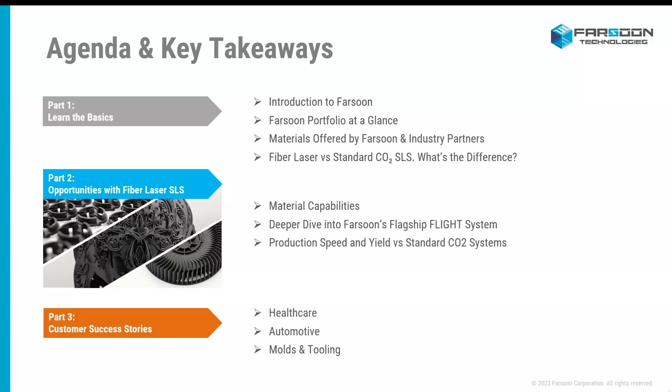Let's take a quick look at our agenda for today. First, we'll learn the basics - who Farsoon is, what materials we offer, as well as our industry partners and the key differences between fiber and standard CO2 SLS systems. Then we'll dive deeper into our fiber systems and the opportunities they unlock. To wrap up today's webinar, we'll take a look at a couple of Farsoon customer success stories using our fiber technology.

Farsoon globally has grown exponentially in the last year as we've broken ground on our new headquarters offices and a new material factory, as well as hitting the 1,000 mark for systems sold around the world.

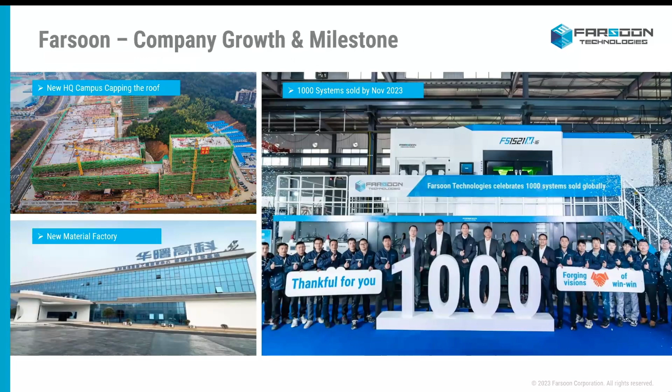Farsoon Americas, located in Austin, Texas, offers a dedicated local service team and inventory with key machine components sourced in the US. Farsoon Americas also offers a strong technical and application support team to assist customers on site in machine operation and material development, or remotely from our Austin office.

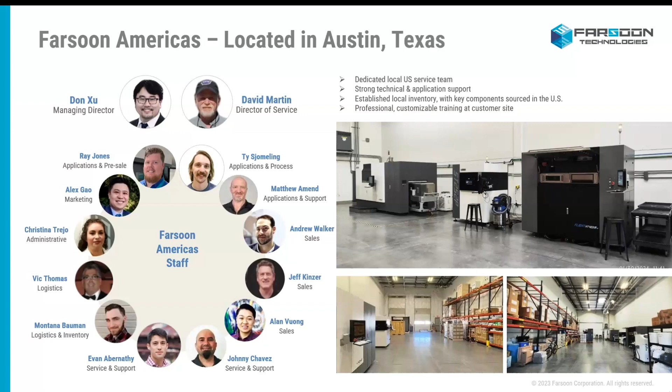Over 10 years of technology innovation, Farsoon has developed a comprehensive polymer machine portfolio, which features a wide range of build envelope and temperature capabilities that suit many industry applications, from material development and series production to large-scale parts and continuous manufacturing.

In 2019, we announced our biggest technology innovation with our flight technology by replacing the CO2 laser, which is traditionally found in SLS systems, with a fiber laser. This offers high-speed production and fine detail feature options to Farsoon's SLS systems.

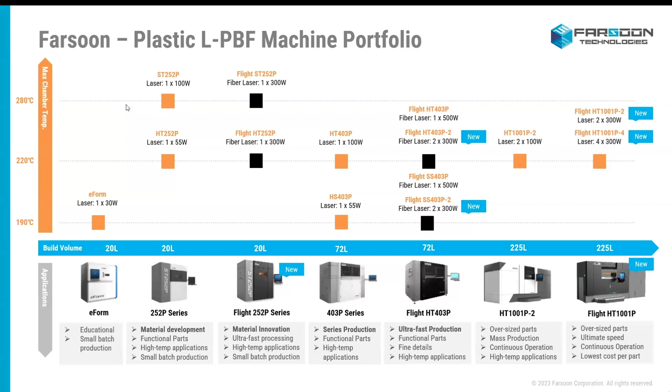Looking at our polymer system portfolio, we can see that Farsoon offers a variety of options based on customer needs and budget. We offer a variety of build volumes from 20-liter small batch production and material development systems, to 72-liter serial production systems, to 225-liter oversized part and mass production systems. Max processing temperatures range anywhere from 190 to 280 degrees Celsius. Our customers can really choose and fit a machine to their specific needs and applications.

Farsoon believes in an open material and platform environment. What this really means is that while Farsoon does manufacture our own PA12, both neat and filled variants, as well as a PA6 glass filled material, we partner with some of the industry's largest material manufacturers to help fill the gaps. This offers our material portfolio from base PA12 materials to TPU and TPC, PA11, both neat and filled variants, polypropylene, PK5000, ESD materials, and many more.

We have ready-to-go material parameter files for all of our partner materials, as well as processing assistance if needed. Additionally, as part of our open material platform philosophy, we open several key parameter values to the end user to fully assist in material processability.

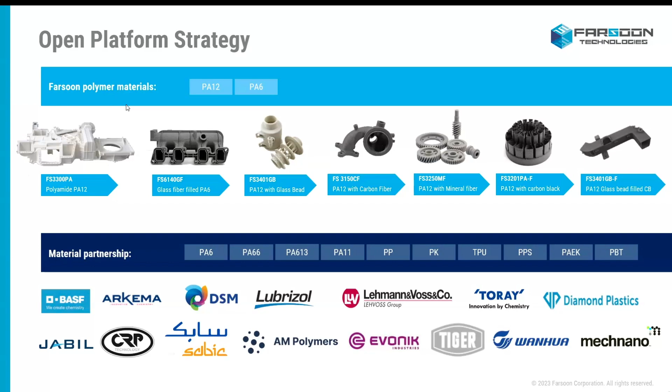So comparing CO2 laser and fiber laser systems, we can see a couple of key differences. The first key difference is laser beam spot size. Traditionally, CO2 SLS systems use a laser with a spot size anywhere between 400 and 500 microns. This usually restricts our minimum feature size to about 1 millimeter, or about twice the size of the laser spot size. We can see though with a fiber laser, we can get down to around 100 microns in the contour or outline pass to get real fine feature details around 0.3 millimeters.

We are also able to open the fill pass to 1,000 microns, which greatly decreases build times. The second key difference is laser power.

The standard operating range of CO2 lasers is usually around 30 to 120 watts. Fiber lasers, which are traditionally used in metal laser powder bed fusion systems, because of their more dynamic power range, can access wattages between 300 and 500. This gives us not only overhead on material processing ability, as some materials may need more laser energy at the bed than others, but this also unlocks a significant increase in scan speeds from 10 meters per second on the low end to 20 meters a second.

The last key difference between CO2 and fiber lasers is their average lifespan and operational stability. On average, a CO2 laser has a lifespan of approximately 12,000 hours, or roughly between 2 to 3 years of operational use, depending on power usage. Power stability on the laser, how much it drifts during operation, can reach upwards of plus or minus 6% during extended continuous usage.

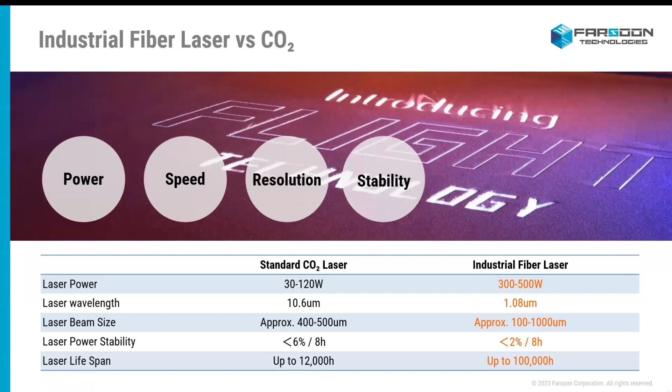So using a fiber laser unlocks more laser power, which allows us to more easily process higher tier engineering grade materials. Traditionally, to process materials like PA6 or PA66 or PAEK, which need higher energy densities at the part bed, a double fill scan would be needed, as most CO2 lasers can only safely reach about 100 or 120 watts on a single pass. So this primarily increases build time and laser life usage.

With a max laser wattage of 300 watts on our dual flight laser system, or 500 watts on our single laser flight system, we can process these materials in a single scan at a much higher laser wattage. This can potentially cut build times by 50% and also increases laser component life because there's less stress on the laser components.

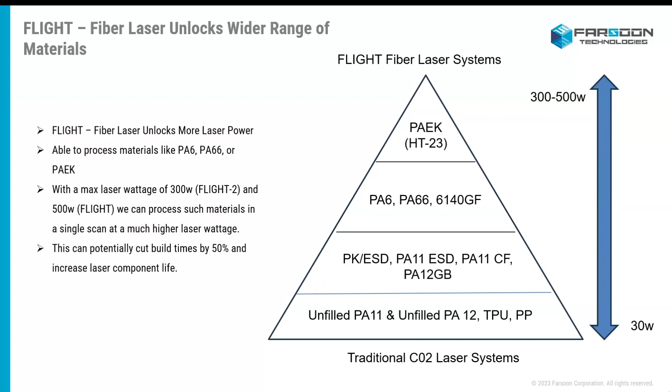So what materials can the end user of our flight systems expect to use? As we can see, there's an extensive list of materials ranging from base PA12 to PA6, PK, which is a polyketone material, polypropylene, PA11, neat, ESD, and carbon filled, and some gray and black TPUs.

As you've probably noticed from this list, there's one common theme of all these materials, and they're all black or dark gray in appearance. It's because the wavelength of the fiber laser is only able to transfer its energy to dark materials. White materials kind of act like a mirror of sorts. They reflect the laser away from the part bed.

That being said, there is some amazing work being done by some of our material partners to add additives to lighter materials to help aid in energy absorption so that we are able to process at a much wider range, both white and dark materials in our flight systems.

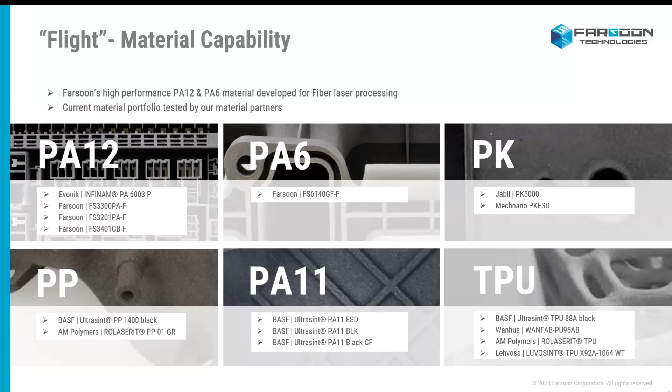So kind of looking at some material processability issues with CO2, traditional SLS technologies. One of the biggest obstacles to processing TPU with a CO2 laser is the amount of smoke and particulate that it produces during the sintering process. This smoke and off gas finds its way to the laser window, where it reduces laser power through the laser window at the part bed.

So if you start at 40 watts, after 3 or 4 hours of the sintering process with all that smoke and particulate sticking to the laser window, you might actually be only getting 20 or 15 watts at the part bed. So this requires either shorter builds to avoid the smoke buildup on the laser window, or manually going in and editing the laser wattage parameters through the build process.

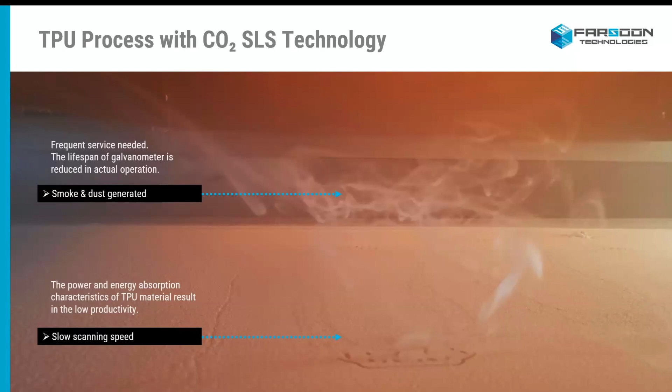Another obstacle is the way that the material absorbs the laser energy, which results in slow sintering speeds and low productivity.

So I'm going to play a short video here of our flight system processing our TPU material.

The first thing that we can see is that there is no smoke generation while using the fiber lasers. This keeps the laser window clean, which allows us to complete full Z-height builds with little to no operator interaction. The way that the TPU material absorbs the energy from the laser, the fiber laser also allows us to utilize the max scan speeds of our flight systems to increase productivity and machine turnaround.

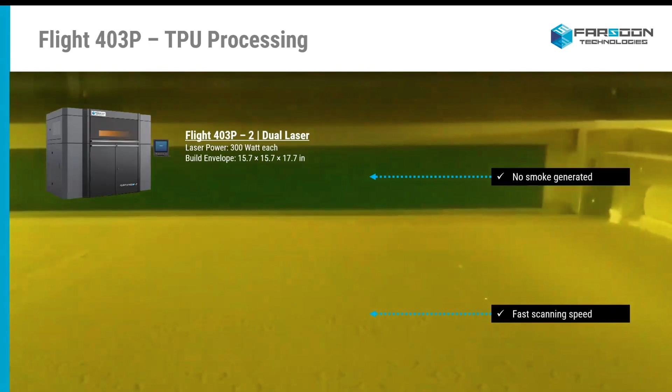So one of the better use cases for TPU in our flight systems is shoe soles. It's kind of the rage right now in SLS. You've probably been to Dick's or Academy or any of these sporting goods stores, and you can see the Adidas or Under Armour, they have this lattice outer sole.

With the flight system, we were able to pack the build envelope with 50 shoe soles, and we were able to accomplish a full build in 17 hours. Which, if anyone has ever processed lattice structures in SLS, can attest to the long layer times just because of the complexity of the lattice designs. There's a lot of laser jumps. So not only were we able to take advantage of the ease of processability with fiber lasers, but also the increased scan speeds.

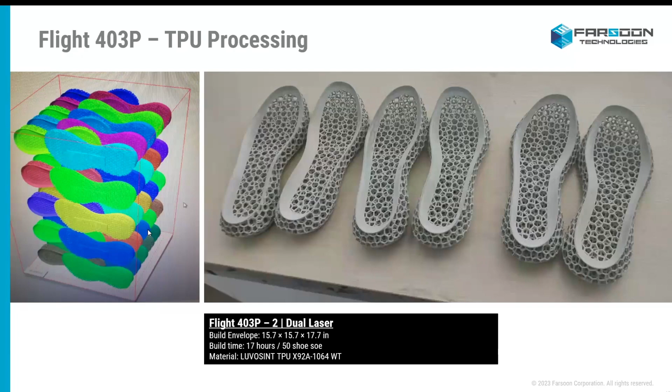So to take a look at our Flight 403 production platform, the 403 is a bottom-fed single or dual laser SLS system with a build envelope of 400 by 400 by 450 millimeters, and a max process chamber temperature of 220 degrees Celsius. The feature that makes this system unique is that it is equipped with removable feed and build cartridges.

This allows for faster machine turnover compared to a lot of other SLS options, as operators can stage next build ready cartridges and hot swap them with depleted feed cartridges and completed build cartridges. You can see number one is our feed cartridge, number two is our build cartridge. So once a build is completed, we can remove those and insert a filled feed cartridge and an empty build cartridge into the machine, load up our build and push go.

As we move right, we can see some accessories developed by Farsoon to increase machine turnover and productivity. Our external cooling box and cooling station greatly decrease the cooling times of completed builds in a user-controlled inert environment. This not only increases productivity, but also ensures material and part properties.

Some materials like your PA6 materials, your high temp processing materials, naturally take longer to cool down. One, because they are processing at a higher temperature, but also because we really need to preserve those mechanical properties, whether they be tensile strength, elongation.

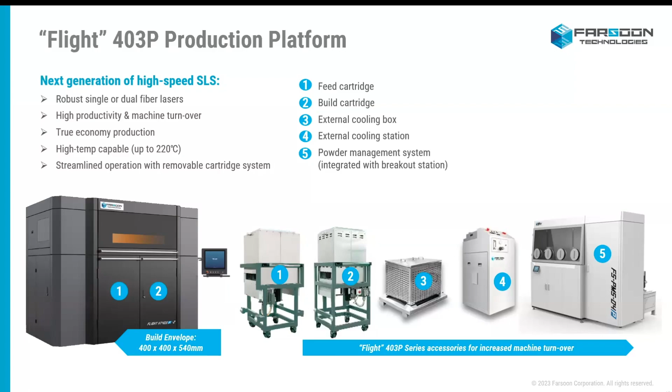So I'm going to play this video right here. This really showcases and drives home what I've been discussing up to this point, comparing CO2 to Flight.

Our CO2 system is on the left corner, our single fiber laser system is the right corner, and middle bottom is our dual fiber laser system. We can see that our dual laser system is able to scan a layer of 20 parts in 26 seconds. The CO2 system can scan 5 parts in the same time frame. And while the single fiber laser system was able to scan the outline of all 20 parts, it was only able to scan 8 full parts.

Farsoon manufactures the industry's largest SLS platform system, equipped with either 2 or 4 300-watt fiber lasers. The 1001 offers a build envelope measuring 1000 by 500 by 450 millimeters, which is 3 times that of our 403 system. The 1001 platform is a top feed, side loading conveyor based system that is ideal for either producing large scale parts that traditionally would have to be produced in multiple parts and joined together in post processing, or large scale production runs of small to medium sized parts.

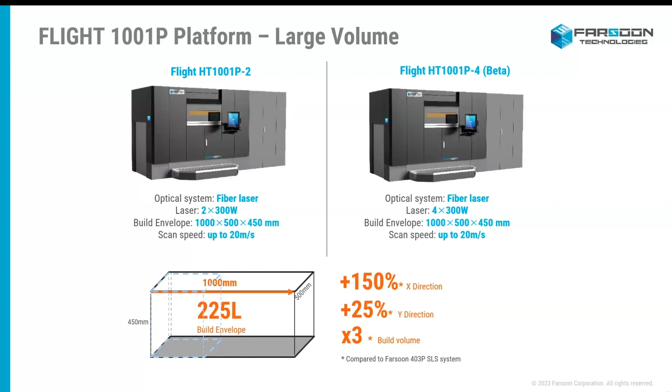Additionally, the 1001 can be equipped with an optional cool down station that actively cools one build while a second build is in the build process, actively sintering. This cool down station uses an active nitrogen supply to cool builds in a closed inert environment.

So to put into perspective the level of productivity that our Flight systems offer over traditional SLS technologies or other additive technologies such as MJF, we put together a full pack-out build of the same standard size parts in an MJF build envelope, our standard CO2 403 system, our single and dual laser Flight 403 systems, and then our dual and quad laser 1001 Flight systems.

As you can see from the start, our 403 system has an advantage, being able to fit almost 100 more parts into its build area. Looking at our standard CO2 laser system, the HT403, which is comparable to most mid-size SLS systems currently on the market, we can see that although we are able to nest 266 parts into the build envelope, we are looking at a 25-hour build, which is not quite ideal.

And that's where our single Flight laser system comes into play. We're able to cut down the build time to a little over 16 hours for 266 parts. That gives us 1.5 times the productivity yield in just about the same amount of time as the MJF system.

Moving to our dual laser Flight system, we can see that we can cut down that build time even further to a mere 10 hours, giving us 2.5 times the productivity yield. That's 266 parts in 10 hours compared to 168 parts in 13 hours.

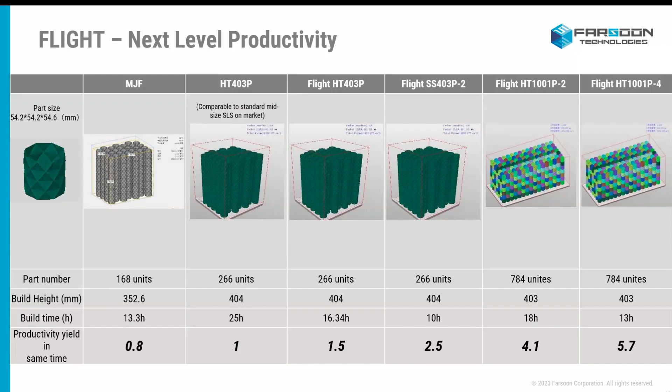So I want to take a look at a couple customer use cases using our flight technology and some of our materials that have been developed specifically for our flight systems.

The first customer success story I want to take a look at is this 3-piece molded fiber tooling set. This was created in our FS3201 material using the dual laser 403 flight system.

The customer was able to custom design a cavity mold as one piece to avoid sectioning and machining the part in a traditionally manufactured type environment.

Utilizing the flight system's fine detail capabilities, the customer was able to design a mesh screen mold insert with detailed mesh density and wall thickness. Finally, utilizing the material's mechanical strength, the customer was able to create the final component, the mold body, that was used to apply pressure to form the desired molded part.

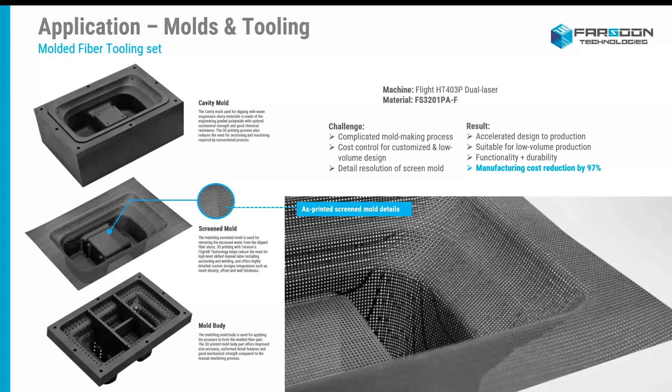Being able to design the exact part that they needed, the customer achieved an accelerated design to production cycle and reduced manufacturing cost by 97%.

Next, I want to highlight 2 different automotive applications using our PA6 glass fill material. The first is an NVH cover printed in our 6140 GF, which is our glass filled PA6, using the Flight 403 system. This customer was able to create a unique sound dampening design to reduce structural and airborne noise with the added bonus of structural strength and impact resistance, which are both important components to under the hood applications.

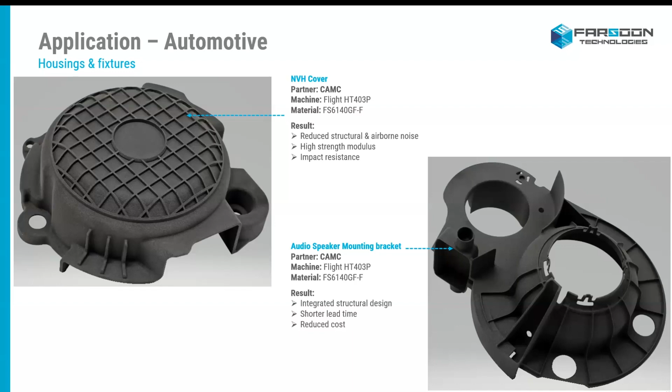The second application is an audio speaker mounting bracket, also printed in our PA6 glass fill material. Being able to print the full bracket as one part greatly reduced lead times and material and labor costs, while also taking advantage of the structural strength of the design being one complete piece instead of joining 2 or 3 pieces together.

One of the strengths of SLS is being able to design custom parts for your in-use applications. One of my favorite applications is this automotive headlight housing and assembly printed in our 3201 material.

This customer had a unique design in mind and was able to print the housing and assembly as one part, post-process the part, and install it directly into their car. Over traditional manufacturing means, this process saved time in the production process and resulted in a cost reduction of 98%.

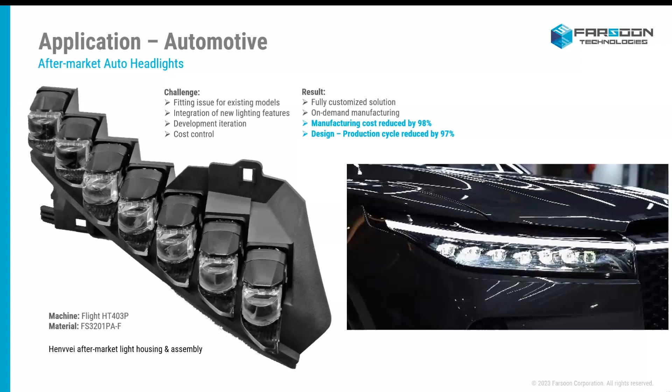The last set of automotive customer applications I want to showcase are ducts and airflow pipes. Our first application is a complex multi-channel air duct printed in our 3201 material. Utilizing the strength of our material, the customer was able to print this part with improved structural integrity and in one piece over traditional manufacturing methods.

The second air duct needed high temperature and corrosion resistant properties that our 6140 PA6 glass filled material excels in. This customer was able to print this custom fitted part on the 403 utilizing an engineer grade material with ease.

And the last application is a multi-directional airflow pipe, which was printed in our 6140 PA6 material. This customer was able to design a part with an integrated structural design using material that met their tensile strength requirements and utilizing the fiber laser system. They were able to achieve their accuracy and tolerance specifications.

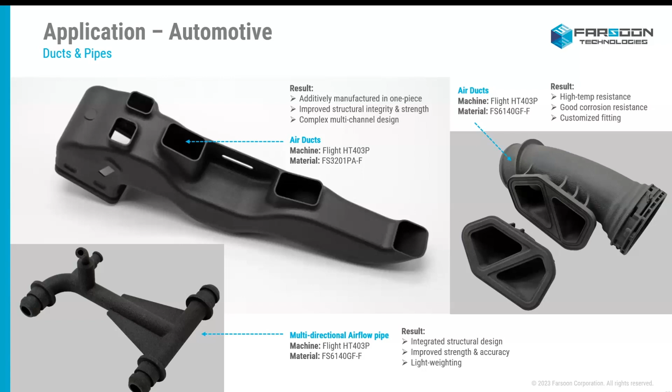And the last customer application I want to showcase is in healthcare with a mid-layer orthotic insole and knee brace.

Customizability using SLS technology is a perfect fit for shoe wear, as I mentioned previously, especially with sole correction and arch support. Being able to scan a patient's foot and print a tailored insole is key.

Using a strong but flexible material like 3201 allows the wearer to use this part on a daily basis without any show of wear or tear or fear of the part breaking down in everyday use.

Same can be said for knee braces. They can be fully customized for each individual patient's needs. Using BASF's PA11 material in conjunction with our Flight Technology, the customer was able to create a lightweight design that was comfortable for the user and also breathable, utilizing BASF's material properties and capabilities.

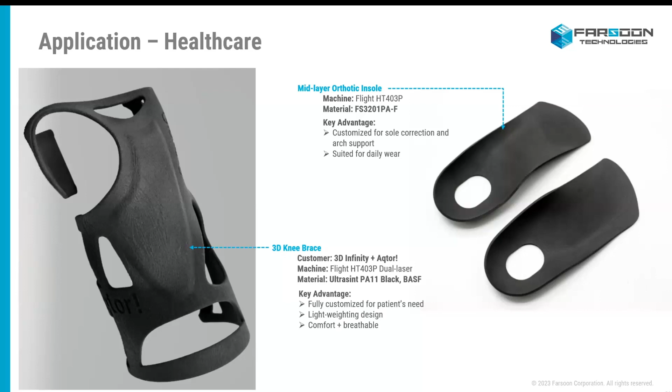So that concludes our presentation on exploring next level productivity with Flight Technology.